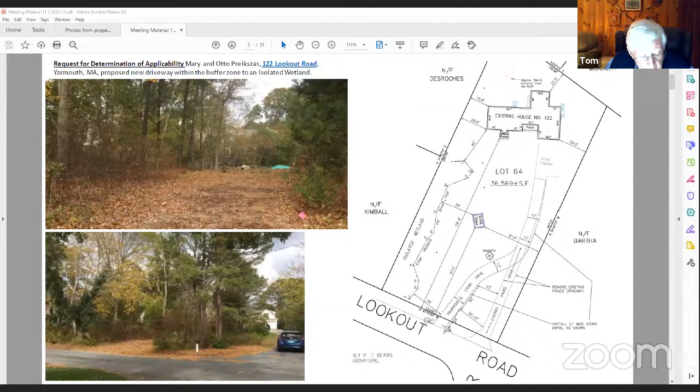Very good. Thank you, Mary. The next is a notice of intent. 65 Winter Street, Paul and Linda McCarthy. Proposed construction of a 3-bedroom dwelling with 2-car garage within the buffer zone to a bordering vegetated wetland. This is a new construction.

Are there any questions or comments from the commission? We have Ron Cadillac in the audience presenting this one. Do you want to present this, Ron? Yes, thank you. Can you hear me? Yes, loud and clear. This is Ron Cadillac, land surveyor and sanitarian, and I had the help of Steve Haas, professional engineer in regards to the drainage on this plan.

You see the latest version here. I'm looking at the narrative that I gave you. We are reducing a little bit the fill under the block patio. I did lower that after I wrote this narrative, and we are increasing the developed area to around 14,000 square feet.

Let me show you. I think you can see me. Can you folks see me? No. Oh, all right. Let me - somewhere I had, this is the first time I've done this on my laptop. I probably should have used my iPad because I've zoomed on that a number of times. I'm not exactly sure how to. What are you trying to do? I'm trying now to activate the video so you can see me. Yeah, this is a webinar, so attendees don't have the ability to use video, only the commission.

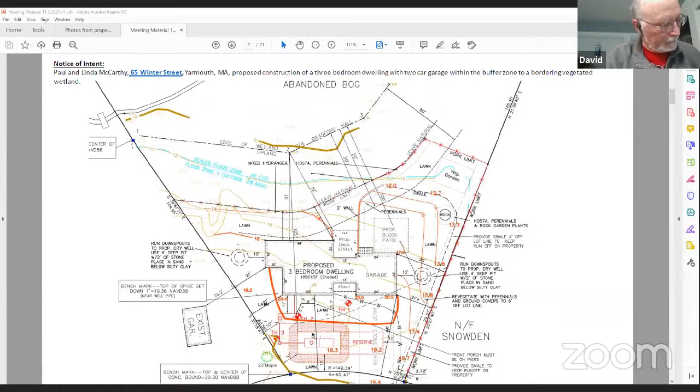Bishop, Aye. Durkin, Aye. Bernstein, Aye. Lawrence, Aye. Hoops, Aye. Huggins, Aye. Mulhern, Aye. Motion carries unanimously to continue to December 3rd.

All right, thank you, Kelly. Next order of business is another continued notice of intent for SE 83-2246, continued from October 15th, 2020, for Robert Griffin, Sweetheart Creek Association, Sweetheart Creek, off Great Island Road, Yarmouth, Massachusetts. Proposed maintenance dredging of Sweetheart Creek.

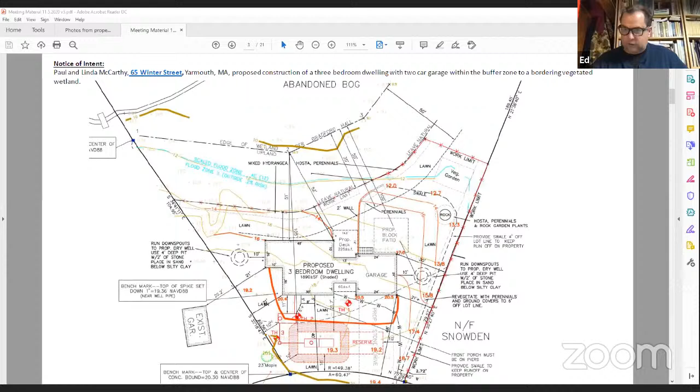And I believe Matt is in the audience, is that right? Thought I saw him there. Yes, I will allow him to talk. He should be able to unmute himself now.

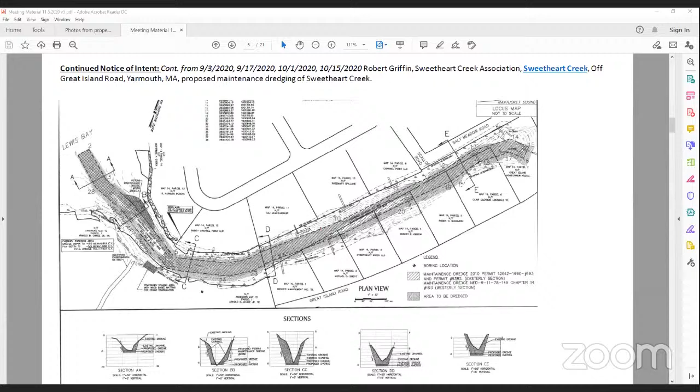All right, thank you. Moving on, we have a request for an amended order of conditions for SE 83-2197, Shrinath and Shyla Narahari, 5 New Hampshire Avenue, Yarmouth, Massachusetts. Proposed revision to an approved plan to replace a pile foundation with a poured concrete foundation with flood compliant walls, flood vents, and an enclosed storage area garage within the buffer zone to a salt marsh and within land subject to coastal storm flowage.

And who is here for that? We have Dan Ojala, and I think the property owner as well, I've unmuted them. Yes, Dan Ojala here for the record from Down Cape Engineering. Can you hear me okay? Yeah, we got you Dan, go ahead. Okay wonderful, so this is a pretty straightforward project.

It's a little bit better than what you approved last time. What we did is they're switching foundation systems. They were going to try and reuse the piles, and you might remember we were moving the house forward, taking one side off with a bit of an addition and going with an upper level. So that was approved, moving it kind of on the same footprint towards New Hampshire Avenue, one row of piles. They've since taken a look at it, and it's such a hassle to redo those piles underneath the existing building and so forth, and then having to remove the other ones and trying to get everything to work. They decided it would be better just to go with a regular A-zone flood compliant concrete wall.

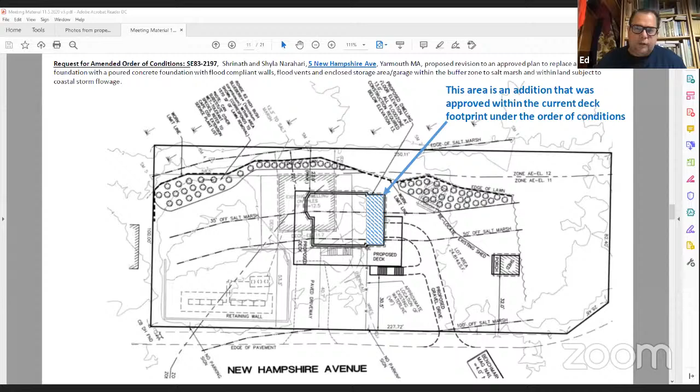So what is left to do then? What part of the project is left to do? Why do you need the extension? I think some of the mitigation will just encroach the lawn space where we're hoping to set up a tent. It's quite a bit of mitigation.

Is the mitigation area then—you were supposed to be putting in a mitigation area? Correct. And you haven't done that yet? That part of it, no. We've done a portion of it. But that's the only thing that you have left to do is the mitigation planting? I can't speak to that. Let me look at our list here. I believe that is it.

We just recently did this piece right here—I'm not sure what that's called. The mitigation piece is all that's left. So everything—you have not done any of the mitigation planting, or you've done some of the mitigation planting? We've done some.

Okay, so what is some? Can you see the screen right now? Yes, sir, I can. Okay, so if we're looking at the mitigation area, what part is in at this point? I believe it's just the coir logs and whatever plantings were supposed to be right there. Just got finished last week. So you have that picture right now. Yeah.

Kelly, could you go back to the plan again to see where that is? Let's see, where are we here? Yes, it's way down near the walkway. This area where the cursor is, if you can see that.

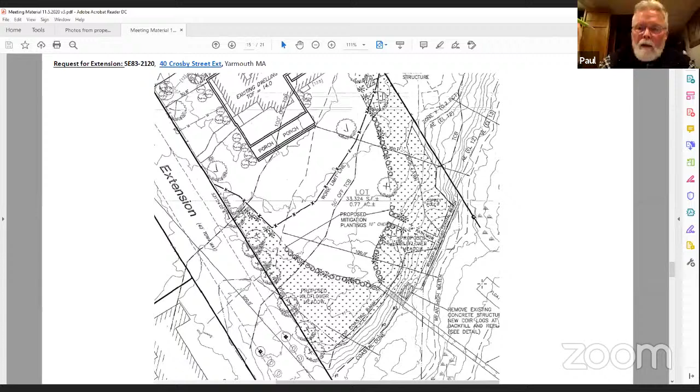Can I ask a question? Ed, Paul, how long has this plan, how long have they had to this point? I understand the whole need to keep it the way it is so they can have the wedding, but how long has this whole thing been going on from the construction to this particular point?

3 years? Yes. And considering when I did reach out to Kelly and inform her that we've been working exceptionally hard. We were considered an essential business. We've been going nonstop, and I did inform her that we've had little to no time to monitor outside projects.

Okay, so unless there's any further discussion amongst the board, I think we're looking for a motion to extend this permit for 2 years. That's what they're looking to do? That'd be acceptable, yes. And back dates, are we talking about 2 years? When is 2 years? Well, essentially 2 years is going to start at the end of the COVID crisis.

Plus 45 days to be technical. We need it to stop. So right now the executive order basically says the orders of conditions all continue as they are until 45 days after the COVID emergency has been declared over. So at that point you would have to start dealing with all of the extensions.

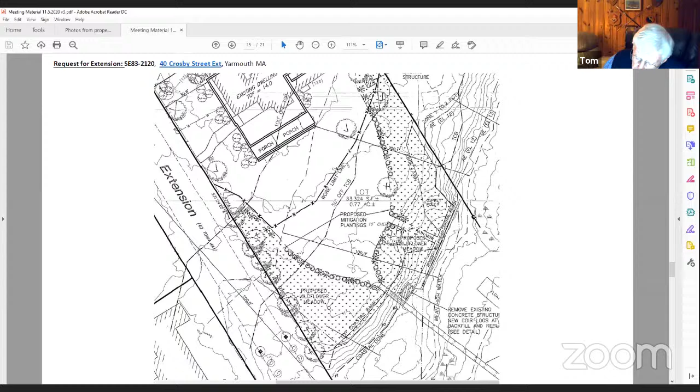Hoops, Aye. Durkin, Aye. Mulhern, Aye. Lawrence, Aye. Bishop, Aye. Huggins, Aye. Bernstein, Aye. Motion carries unanimously.

Okay, thank you, Kelly. Thank you, commissioners. Next order is another certificate of compliance for SE 83-1150, 23 Salt Meadow Road. And Kelly, are there any issues with that? Sorry, should we go back to Powers Lane?

Do you want to do number 10 on the agenda, Powers Lane first? Oh, sorry, we can go Salt Meadow Road. Yeah, here's Salt Meadow Road. Oh, that one, sorry. I'm just getting it, I'm going in the order of my slides. Sure, just go ahead, we'll keep you on your toes that way. All right, I'll just grab the file.

Okay, so this one came about—the property owner is looking to replace the pool shown here with a larger pool. When I took a look at the file, I found there was an outstanding order of conditions. The work appears to have been carried out per the order of conditions largely, with the exception that there are no downspouts to dry wells on this property. It's a fairly large property with a lot of vegetation, particularly buffer vegetation between the property, the road, and along the bank and resource area. I don't see any issues with runoff, but the order of conditions does include gutters and downspouts to dry wells, which are not present at the property. So I'm just bringing that to your attention before you take your votes.

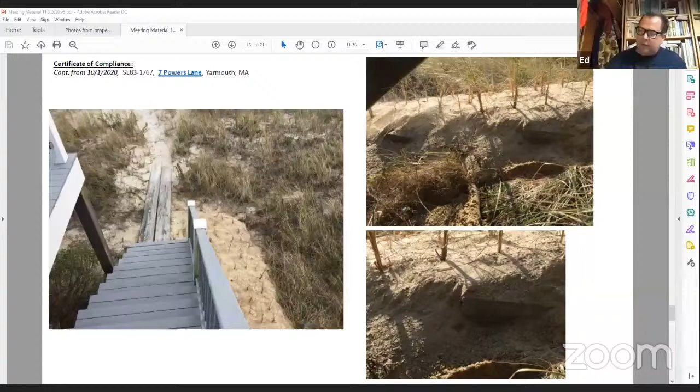So I discussed the violation with the property owner, who is in the audience, and have drafted an enforcement order that includes the restoration of the area with plantings. And I have asked for a notice of intent to manage the area for invasive species moving forward, because obviously the invasive species that have been removed are going to come back fairly quickly. So I thought it was good to move on getting the area restored in the short term, and then include longer term management of the area.

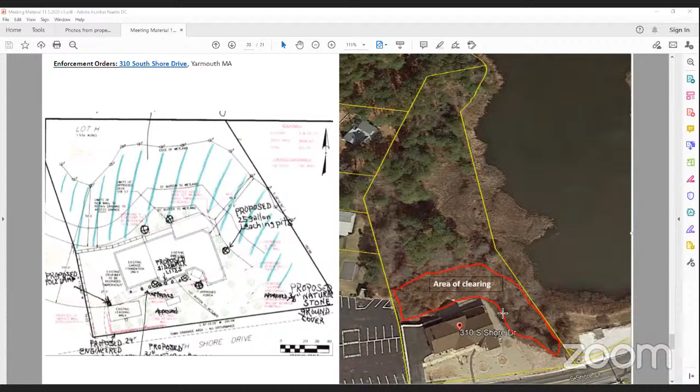So just looking for if you have any amendments to the enforcement order. If the property owner is in the audience, if you wanted to hear from them, and then just if you wanted to make any changes to that enforcement order.

Okay. I mean, this is certainly not the way to state this, but if we had the ability to throw the book at this applicant, I would find a way to do it. I can't even count the number of times this fellow has been before us with violations and not finishing plans. This has gone on for years. It's extremely unsatisfying.

I would say I 100% agree with you there, Rick. I mean, to be honest with you, I'm speechless. I don't understand how somebody who has gone through all of the history with the commission and all of the other enforcement issues that have gone on with this property can even think about doing this.

I'm with you. If I could throw the book at you, I would throw the book at you. If I could figure out how to get you to the $25,000 mark on the fine with a maximum fine, I would do it in a minute because this is ridiculous.

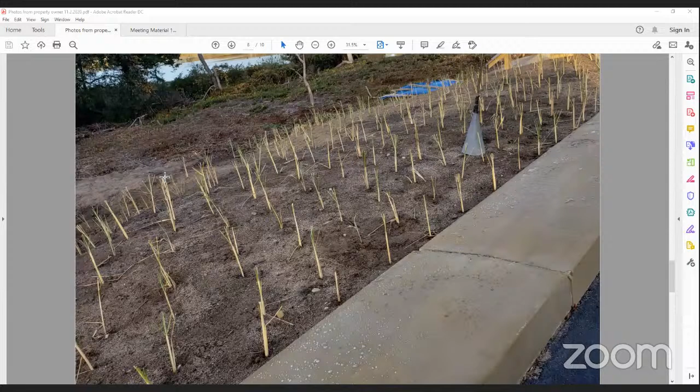We just wanted to replace it. Oh, the junipers, that picture you just saw, the birds love the junipers, the wildlife love the junipers, and we had just started to do the mitigation when we got the desist order. We're sick to our stomach about what knotweed does.

It encroaches so much, it's encroached over on the fence, so I got that all pulled out. The knotweed's our enemy. Well, that was the bittersweet. Yeah, the bittersweet on the fence was pulling it down.

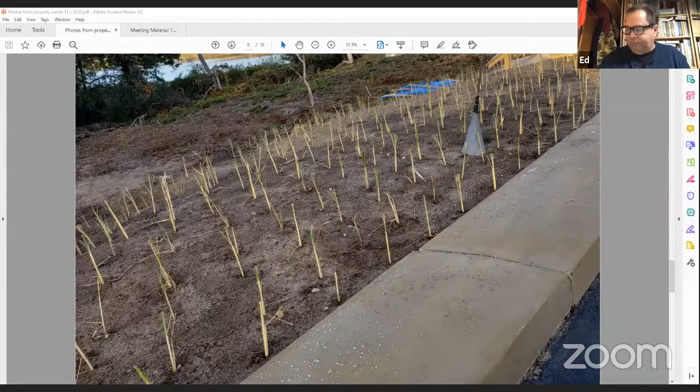All right, I'm going to let the rest of the commission have any questions, if they have any for the homeowners. Any questions at all? Thank you. Commissioners? No.

No further discussion? Well, this is Ellie. Tearing that all out - I understand it's very invasive, but if you don't do it properly, it's just going to come back more aggressive, and it should have been brought before us to have it done properly so that they don't have this ongoing condition. Right now, whatever they plant there is just going to be invaded by these things because it stimulates the roots and makes them grow more, as far as I remember.

Well, I understand that, but if you hit it with the glyphosate at this stage, in like the first or second section, it's like bamboo, and if you put the glyphosate in there in the fall, then it draws it back down into the ground. And it takes 2 or 3 years to do that, from what I've read.

And it's illegal to have it on your property in Great Britain. You can't sell your property with that. You wouldn't be able to sell your property if your neighbor had it in their yard. And it just scared the heck out of us, because we saw what it was doing coming toward our foundation.